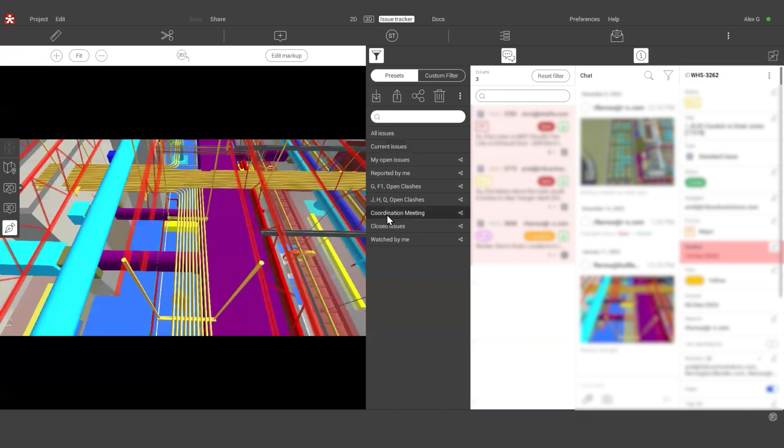At first it was a bit daunting. We had to take some time to learn it, but luckily there were a lot of resources available. The more people we onboarded and trained, the process of learning it just got faster and faster.

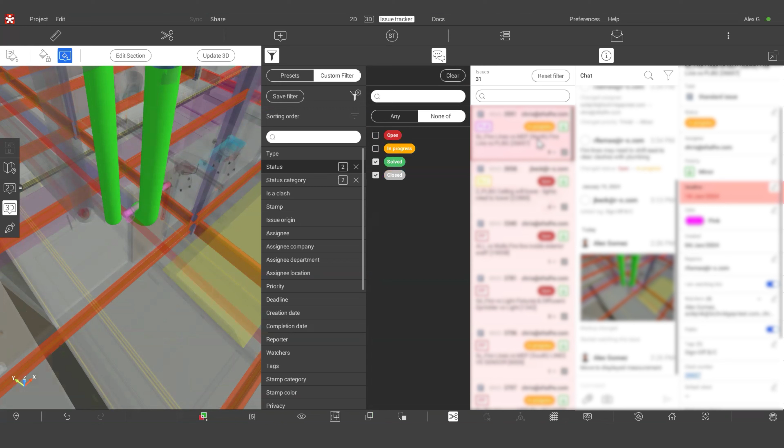It's been such a time saver. It runs really smoothly on our computers and it looks great. Introducing it to new people is really fun because they see it and they're like, wow, this is so different. It feels like a video game.

We now feel more comfortable running multiple projects at a time. Typically we're assigned one project to work off our software, and that's kind of it—that's just what all your time goes into. Now we feel more comfortable being able to run 2 to 3 projects at a time.

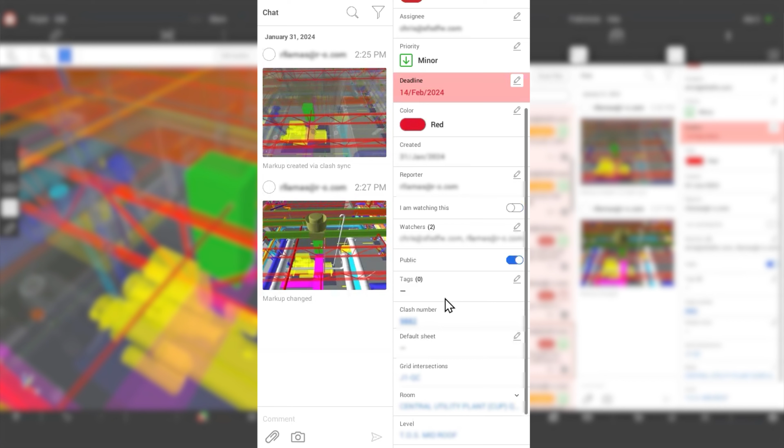It's no longer having to show every single issue to our trade partners during our meetings, but rather it's this ongoing collaboration process throughout the week, and they no longer have to wait just for that one meeting to view every single issue that we've already caught.

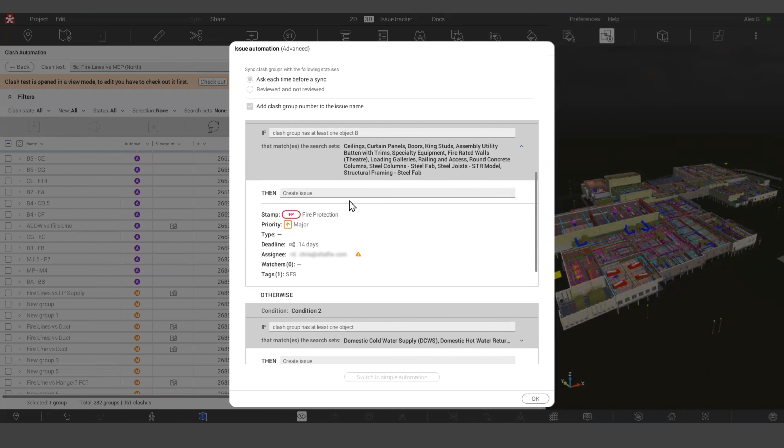Clash automation has been an absolute game changer to our processes. It just saves us so much time having to go through every single issue. Instead of us having to manually group things, it does it all for us. We're seeing people catching issues that I don't think we would have caught before.

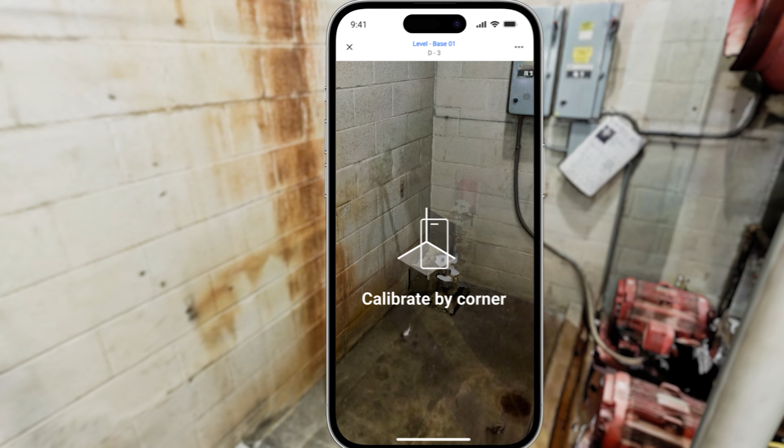The phone app has been pretty interesting to use ever since the augmented reality feature was added. We're starting to encourage our field team to use that little AR overlay feature in the field so they can compare what's in the model and what was actually installed.

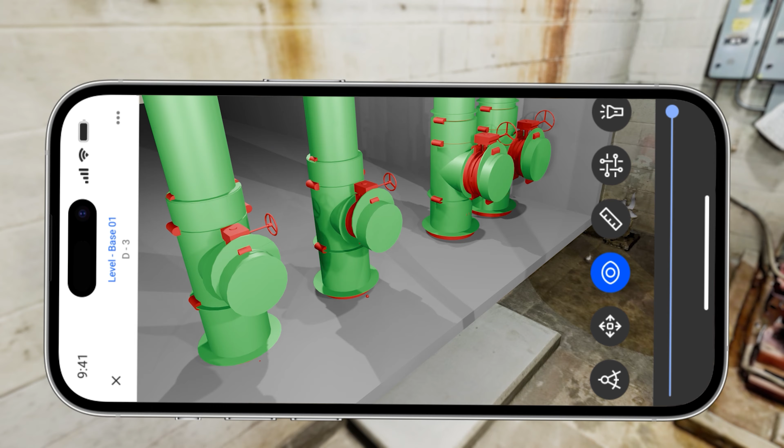I think my favorite Revizto feature, the one I love blowing everyone's mind with, is the 2D overlay. It's such a small, simple feature that does so much. I love showing it to my architects and owners, mainly because they're always looking at the 2D drawings. So when I show them the model, they always ask me, okay, where is that in the drawings?

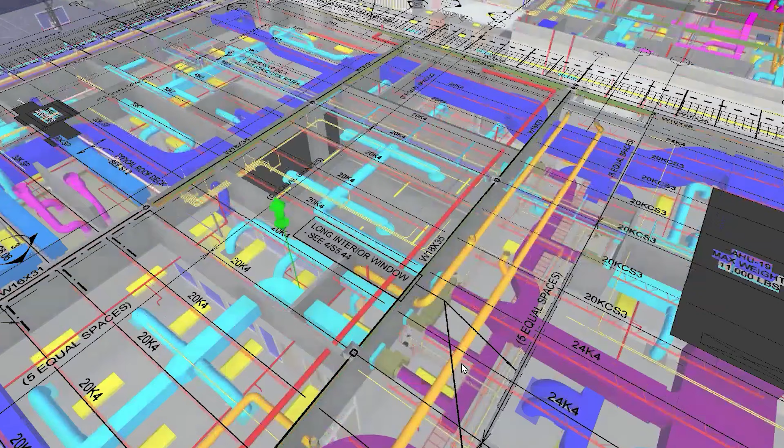They don't see it the same way I do. So every time they ask, well, what is it, where is that in the drawings, I tell them, oh, just one second, and we'll do that 2D overlay onto the 3D model. And they're like, wow, that's really cool. We're able to check to see what it looks like according to what they have in the drawings, which is contract. So I love showing that to everyone.

It's definitely a mind-blowing feature.